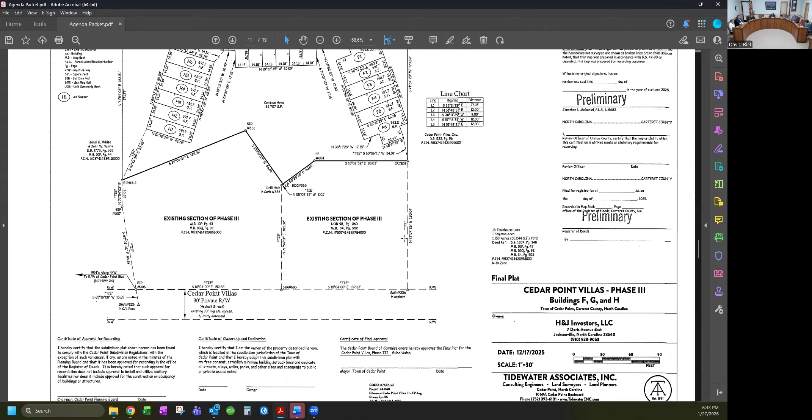Site work infrastructure has been put in place so that no bond would be needed. Planning board has looked at it, reviewed it, and granted its blessing. There's a couple things that need to be updated before we can officially sign it. It does have signature blocks at the bottom for the planning board chair as well as the mayor. A couple items are just some dates in the upper right hand corner, and then a reference to either the corner of the buildings when built being the property lines, the final markers of those property lines, or the plat being updated to reference that irons have been set for each of those corners. Those are just a few minor things required on our list of requirements for a final plat.

It's an administrative decision, so it doesn't take any real deliberation or additional permitting. But Jonathan McDaniel is here on behalf of the applicant with Tidewater Associates to address any concerns or questions you might have, and certainly if you want to add anything, you're welcome to.

We've moved the podium since last time, so you can actually see the TV when you're talking. Yeah, basic stuff. We'll go and set all the irons once the map is approved.

With this being townhomes and part of Cedar Point Villas, the intent is to rope these townhomes into the overall covenants, so it'd just be another phase, but subject to the same covenants. All the outside stuff will be regulated like everything else. Pretty straightforward—they just wanted to do townhomes instead of condos for whatever reason.

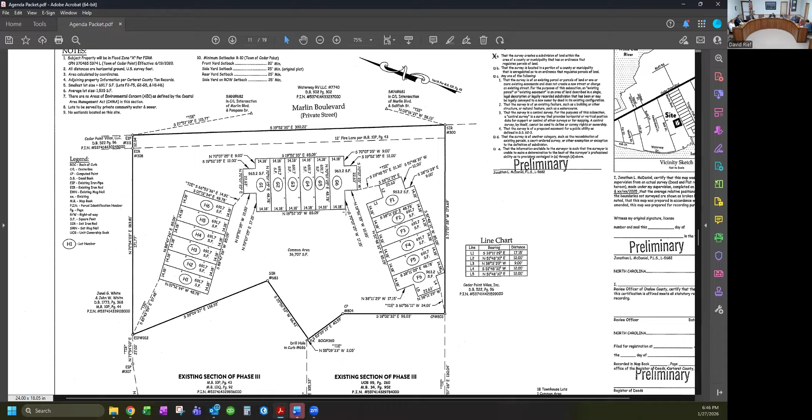Make a motion to approve the final plat for Cedar Point Villas Phase 3. I'll second that. Got a motion on the floor, all those in favor? Aye. Motion approved.

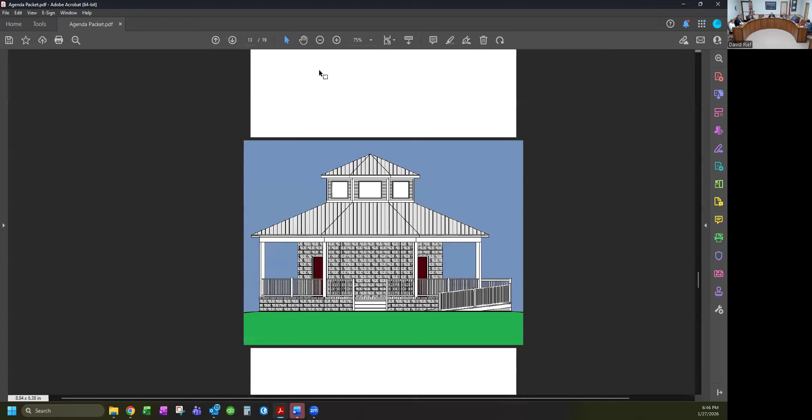David, park and restroom design discussion. In your agenda packet we included a couple items. One is a sketch drawing of what the bathroom facility should look like once it's constructed out there at Boathouse Creek Park. For those in the public who may not be aware, the town is the recipient of a CAMA access grant.

That will help us cover three-quarters of the cost of this project. So what we need to do this evening is, before we can move forward with bidding it out, the next step is to finalize the design drawings so we can send them out for an RFP to start getting bids on construction. I wanted to touch base with all of you and make sure we're on the same page about some of the more detailed aspects of the design.

What you see from the outside, it's an octagon-shaped building. We talked before about the exterior, and we can discuss fine details like paint colors later. The outside will be split face block, so textured block. The roof will be a standing seam metal roof to match what's already on the picnic shelter and pavilion out at the pier. For the cupola, my recommendation would be hardy board.

There's not a whole lot of space there, but we'd do that in hardy and trim it out with a composite type material, looking to reduce the amount of maintenance staff have to do. One issue we often run into with hurricanes and wind-driven rain is any kind of joint like this you see with dormers. So I'd want to make sure they include an ice and water shield that comes up the wall to make sure it stays watertight.

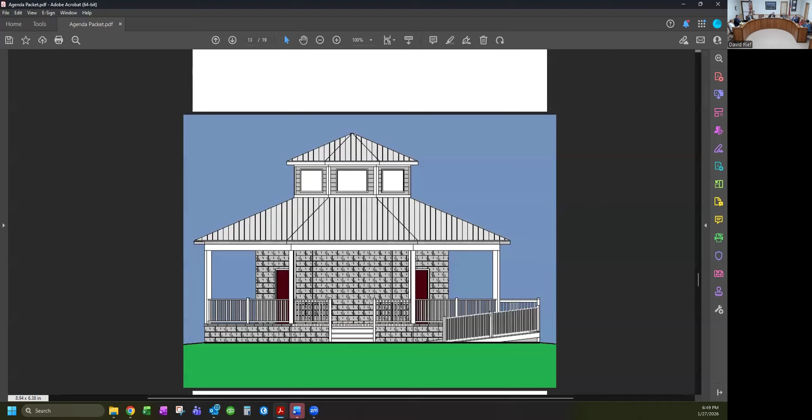I think we've talked about most of that already. I just had more questions about the interior. On the inside of the building, in some of these pictures, just so you know, when I blow them up you'll see they're a little different. This is an earlier drawing that showed some windows on this lower level and the door not being here, but this picture is the most accurate.

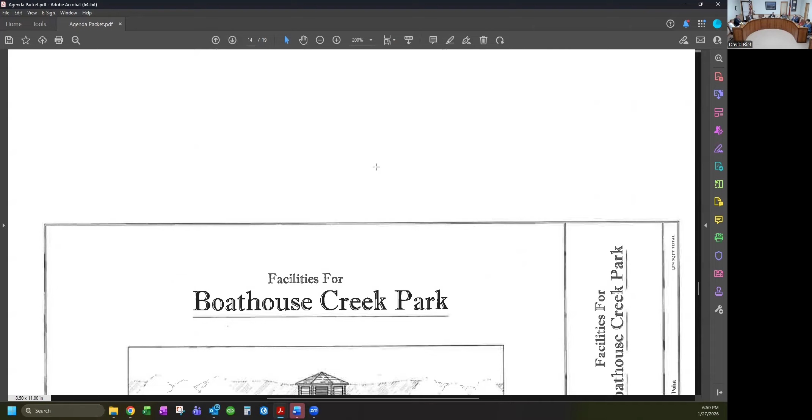This wall here would be designed for message board type stuff, so that's why it's left blank in this picture. From an interior standpoint, you're looking at the side of it, so we're going to have block walls that come up to where the trusses tie in, and we start the incline up to the cupola. The interior of that would just be concrete block, right?

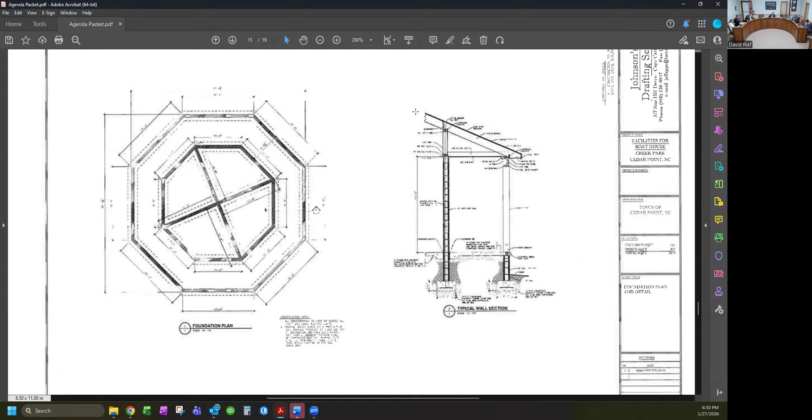That would be whatever color we choose for the split face block. But we're going to have an interior finished surface above that block wall, as well as the ceiling inside and on the interior walls, which don't show up in these very well.

In fact, give me just a second. This is what was in your packet. We were not able to upload to you a copy of the plans from the designer directly because of security that he has on the plans. So let me pull up, so you can see it a little clearer.

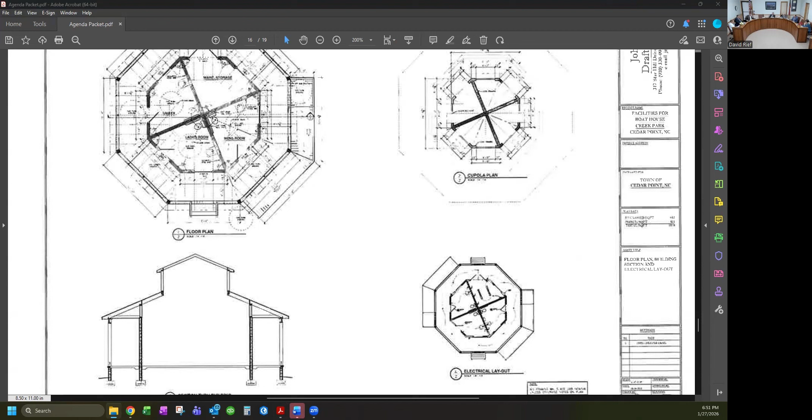That should be showing up a little clearer now. So there's the exterior wall I was talking about. We need some interior finish on it, as well as on the ceiling, and then the dividing walls between the four rooms, three of which would be bathrooms, the fourth would be storage.

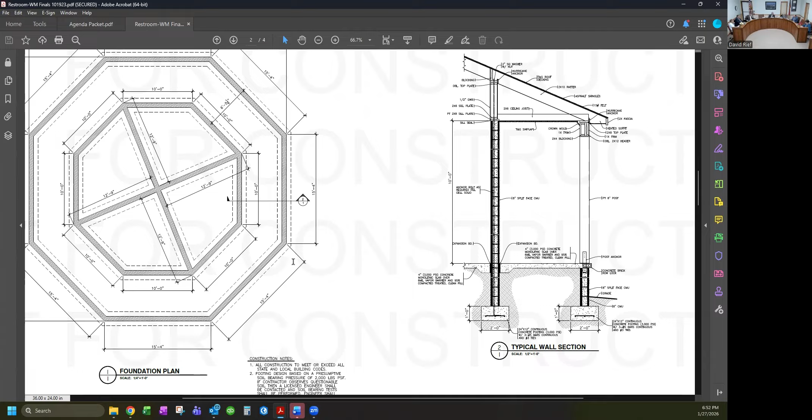You would have the same thing. The block wall would come up to the same height and then move to a 2x6 wall with some sort of interior finish on that wall as well, going all the way to the top of the cupola. From an aerial view, you'll see a wall that goes all the way to the ridge, to the peak. So the main question we need to decide is what do we want that to look like. Do we want just sheetrock, or something nicer like beadboard or tongue and groove wood?

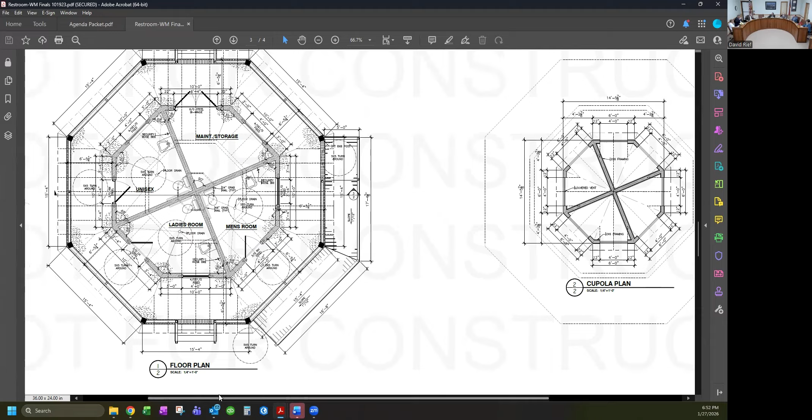How high is that going to start at? That wall will start at least 8 feet high, if not 9.

Just from past experience with recreation facilities, you want to make it as user friendly and durable as possible, thinking about graffiti and vandalism. Whatever we decide on, we need to keep that in play, because you're going to run into those problems more with sheetrock, since they'll destroy that.

I do like the tongue and groove. I think it's probably more durable to handle vandalism type situations. We hope that doesn't happen, but it's going to happen, there's just no way to work around that. That would be my preference, just make sure we put something there that's very durable and can sustain some of that stuff.

Thinking about something like Trex, when you're grouping that with the wood, yeah, composite material.

David and I were talking about not using sheetrock, mainly because of moisture more than anything else. We're really not worried about somebody vandalizing that bathroom, it's a nice bathroom.

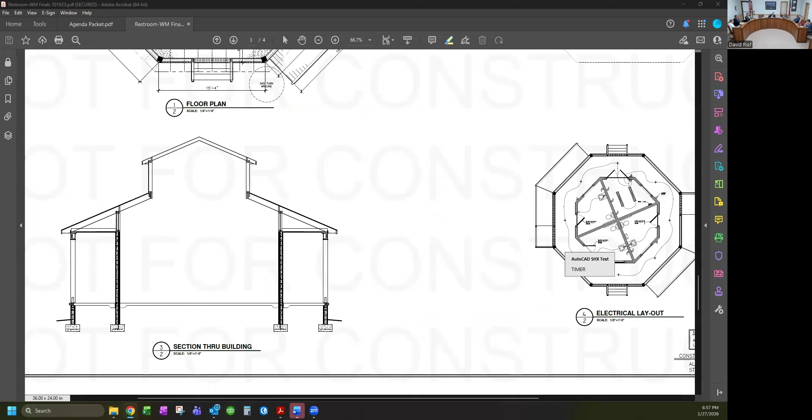Okay, for a floor on the inside, it is a concrete floor. This is a company here locally - they do the epoxy.

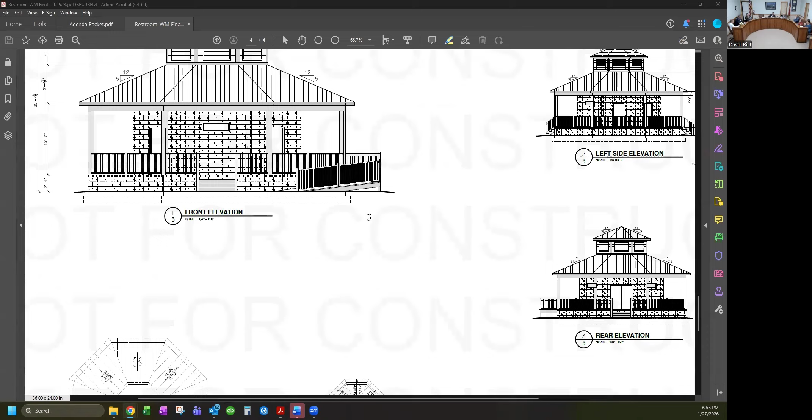I thought I had the link to the actual thing. In the interior, you're gonna have some drains, right? Yeah, that was maybe my next point, in these floors. So I can go ahead and do that. We've done this thing for years.

A few things that you'll see that are a little bit different: you will see a floor drain in each one of them, and you will see a security hose bib. So you've got to have the special tool to make it work.

What I would recommend - we had talked about doing a unisex, a ladies and a men's, but then there was the discussion before to just make them all unisex since they're only one person per bathroom.

With that, there would be moving the sink to the middle of the room a little more, keeping the toilets in the corners because you've got to have the grab bars, and then putting a urinal in each one of them, but they would be in the corners, kind of where you see the sink. And for that, rather than your traditional looking ones that can be broken off the wall,

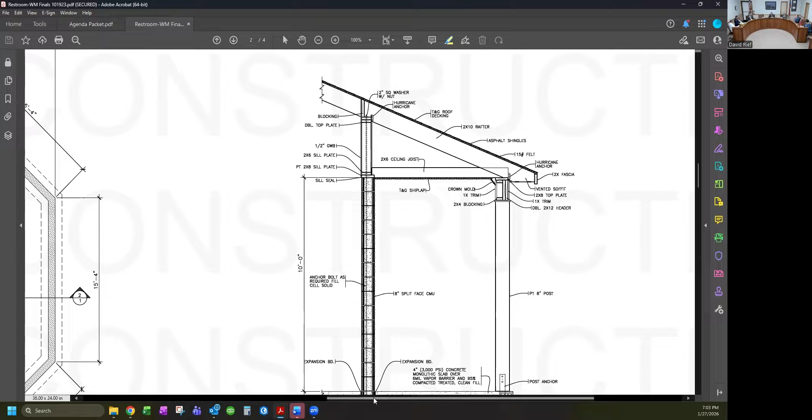We need to let Kurt know. Yeah, trying to make it where it doesn't get tore up. It doesn't get tore up and it doesn't become a residency.

What about exhaust fans? You putting it in there? So yes, with the exhaust, usually for something like that, I would recommend doing just a solid pull, so it pulls all 3 at the same time. Absolutely, so you don't have to worry about somebody flipping one on or off and all that. So 1 fan system, 3 exhausts to it.

The lights themselves being on a timed motion. When you enter, you can push a button or it picks up the motion. Do you do that fan all the time too? Just a dial where it clicks, goes back around, cuts off. That way it doesn't keep running and running and running.

Well, they make them that are designed to run 24 hours, but you can set them to not run overnight, but they just have a slower, quiet draw. It's not like having a bathroom fan that's loud, but it does constantly pull from all of them.

Now one of the questions that we had when we did the initial estimate on this is, do we want to spend the money to have all of the electrical within the concrete block walls, as opposed to exposed pipe and boxes on the face or surface of the wall.

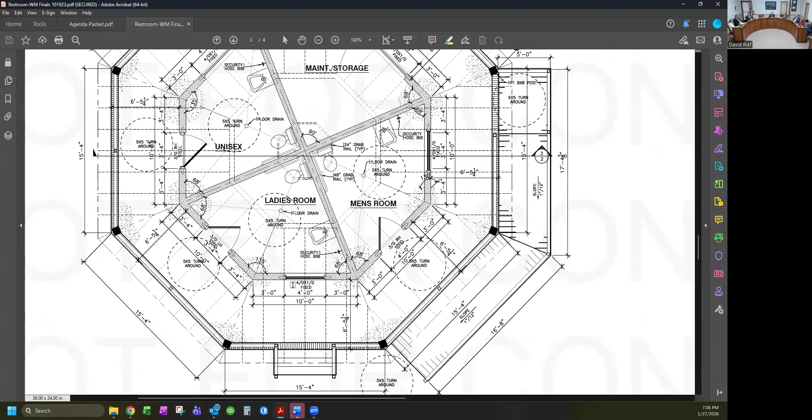I did think one question would be, do we want to provide some receptacles on this front wall? This is the front steps coming up, in case we ever want to put lights or a TV for displaying information as opposed to just a static board. If we're going to put it, you want to do it while you're putting the block work up, not after the fact. Might as well.

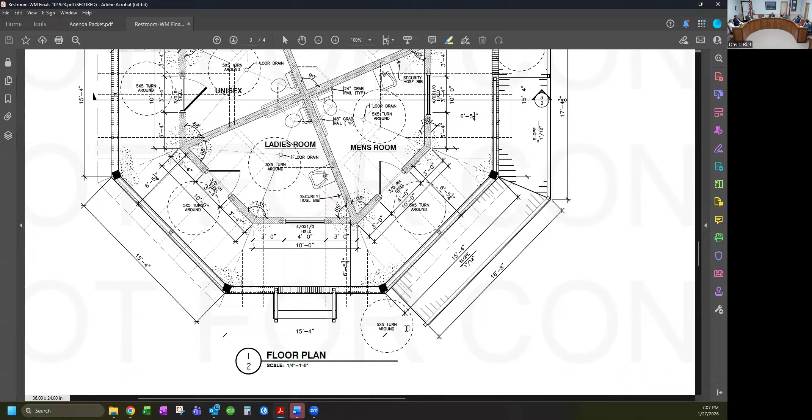Okay, yeah. I don't know if I wouldn't put heat in that storage building too, if you're gonna put a hose bib in. Yeah, I was thinking.

A hot dog, if you don't know what a hot dog is - yeah, it's a little heater. It's called a hot dog heater. You can set them on 50 and it keeps stuff from freezing.

We put a wall mounted heater out here in the shop office that has done great out there. Yes, something of that nature, that you could cut on if it was like this weekend. Yeah, we'll figure out something to do with keeping at least heat in there.

Anything else? No, it looks good. It does look good.

I'll hope to have all this sent to our draftsman so we can incorporate this into the drawings and formalize the details, and hope to get an RFP sent out later this coming month. Hopefully we'll get some bids back for your March meeting.

Think about those shutoffs too for the sinks, where you hit it and it cuts off on its own, the pressure ones, so that we might leave sinks on. Usually on that sort of stuff they'll probably have like an allowance. But we'll make sure we work through those details.

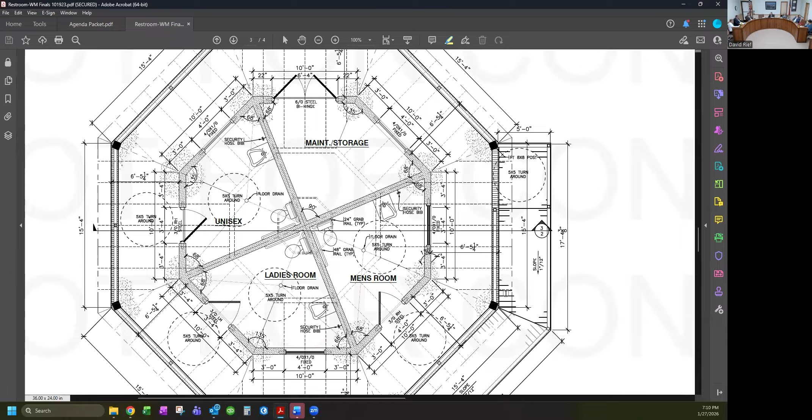Alright, anything else? Nice, if you have anything else just let me know. I'll try to send out the RFP to all of you and let you take a look at it, review it, and if you have any more feedback then we can finalize it and get it pushed out.

One other thing I want to ask about: on the outside, out in the parking lot, you come down the stairs, bottom of the ramp, there'll be a little bit of a walkway that goes to that front parking lot there - a water fountain system set up. I've got it loading here on the center screen at the moment, hopefully.

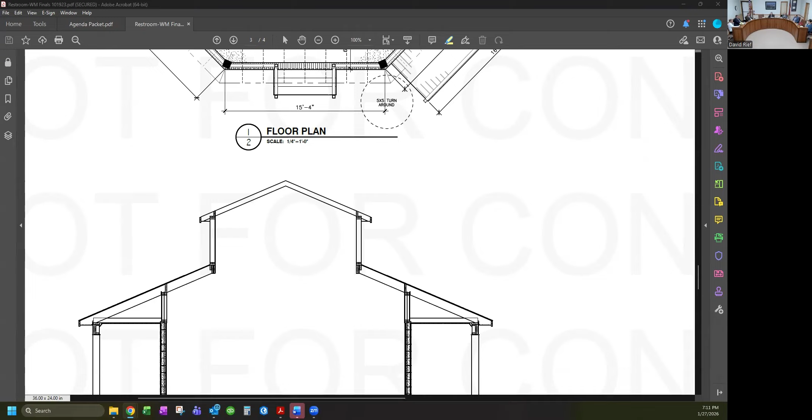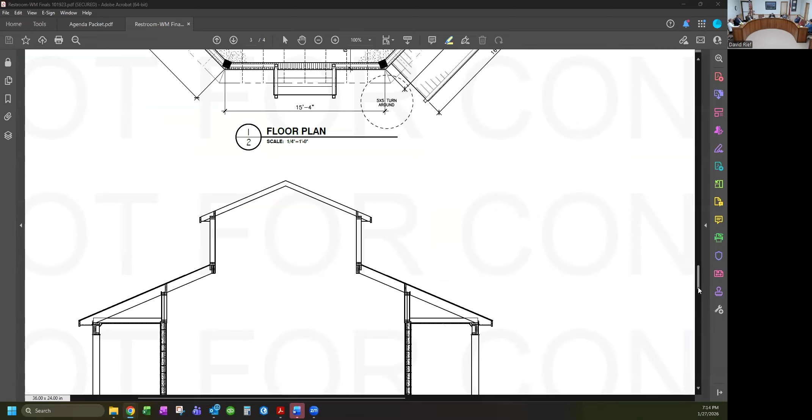That's really all I have on that. Thank you all, that's good. Glad we got started. I'll be glad when we finish. Good thing. Oh God, had to get the money right. Well... I don't know how to say anything. Thank you, Cam.

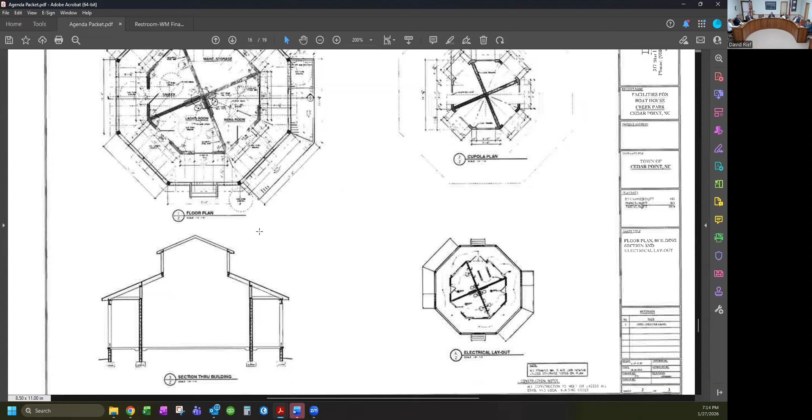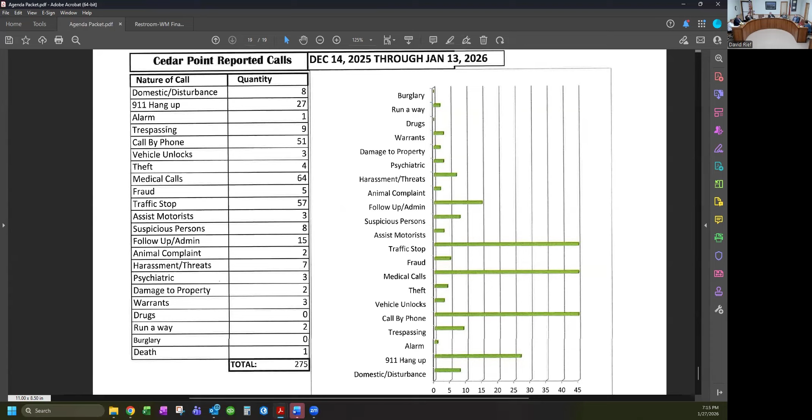Really, the biggest thing I talked to the town manager about tonight is we picked up an identity theft case here at Cedar Point, two of them, and we've got pretty good leads on them since I picked them up. So we're going to go ahead and move forward with that. I'll also be contacting New Bern about it, one of the people living there in that area.

Our homeless guy that I talked to you about before Christmas has relocated himself to Swansboro, so he's left Cedar Point. He's found somewhere else he wants to be, so we haven't had any problems with any homeless people. He was on the sidewalk over there yesterday. Okay, well, he was in Swansboro, he had company. Did he? So they may send him back. Well, we got rid of him for a little bit, but other than that we have not had a whole lot other than those cases, which is a good thing.

Is there anything I can do for you, for any concern you may have, other than traffic? Kirk, I know there's one off of Old 58, where the T is going, when you come off of VFW Road.

Yes sir, you're probably all aware of this, they keep going over there. I see it because I come up that road every day in the morning, but there's something going on over there. A couple of guys keep going over there, I see them walking out of there, going in there with a weed eater, with a hedge trimmer. So they're making camp back there somehow. They're doing something back there. Well, we'll definitely find out. It's been brought to my attention through people in our surrounding areas, making me aware. But when you see a weed eater go in the woods like that and hedge trimmers come out, then there's something going on.